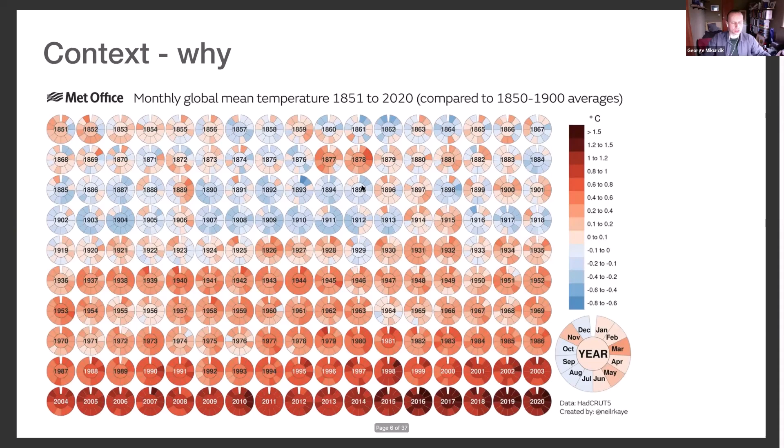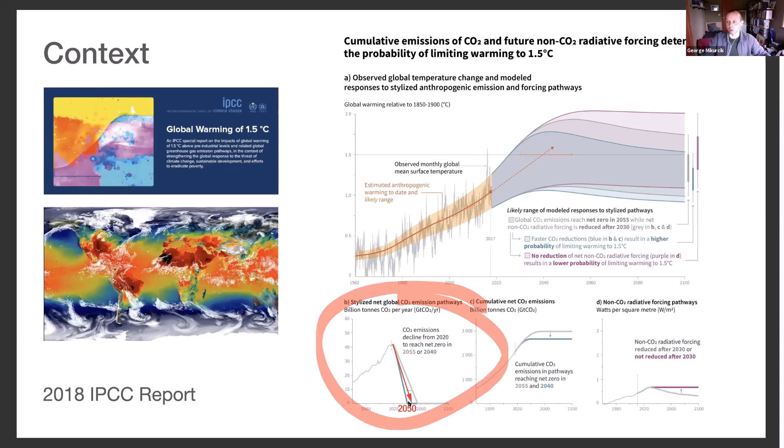In 2018, the IPCC, the Intergovernmental Panel on Climate Change, came up with a report that clearly outlined the pathways to stay within warming of 1.5 degrees from pre-industrial times. Where we are now is on top of this peak right in the middle of the screen, and where we need to be by 2050 is down at the bottom here. So it's a big, big challenge and really focuses our minds.

What it means for designing buildings is really we need to stop burning fossil fuels. That's the clear message. We need to say goodbye to gas boilers, oil boilers, and embrace renewable technology such as heat pumps, and we need to do it from now.

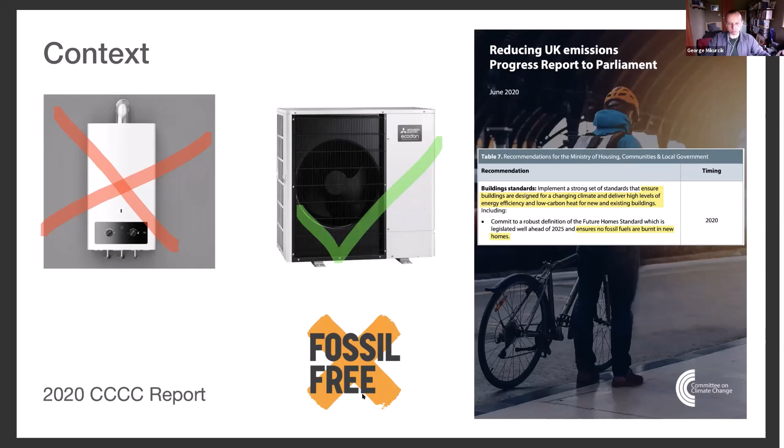So how do we get there? We could either do business as usual and wait for the grid to decarbonize. We know the grid is getting cleaner all the time, with more proportion of wind, solar, tidal, etc. So we could keep building inefficient buildings, but what that would mean is there will still be a huge demand on energy, and we would need to offset that energy by a huge amount of renewables.

Or we could do something a little bit more sensible, like radically reduce the demand in the first place, so have a small proportion of that demand, save a lot of energy, and generate only what is needed. So we obviously think the second option is the more sensible one.

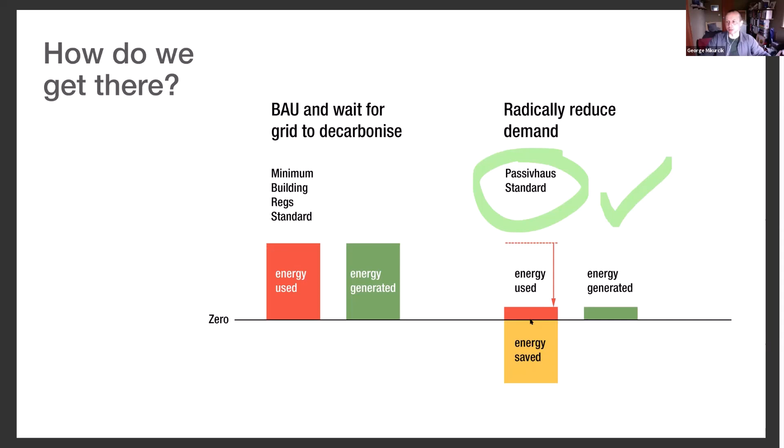So I mentioned Passivhaus in the previous slide. Most of you have probably heard of Passivhaus. It's a standard that guarantees quality of design and construction, provides comfort, focused on reducing the risk of overheating, drafts, mold, and poor air quality, and delivers huge savings on energy.

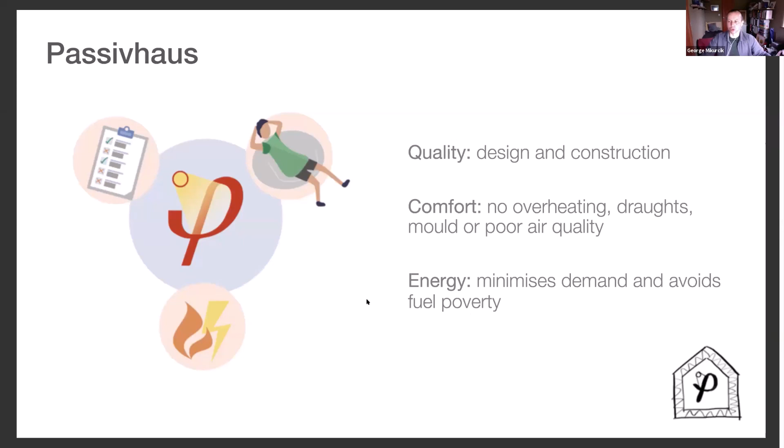And how it's doing that: it's doing it by efficient form, good orientation, using continuous insulation, having a draft-free construction, very efficient services including mechanical ventilation and heat recovery, and optional on-site renewables.

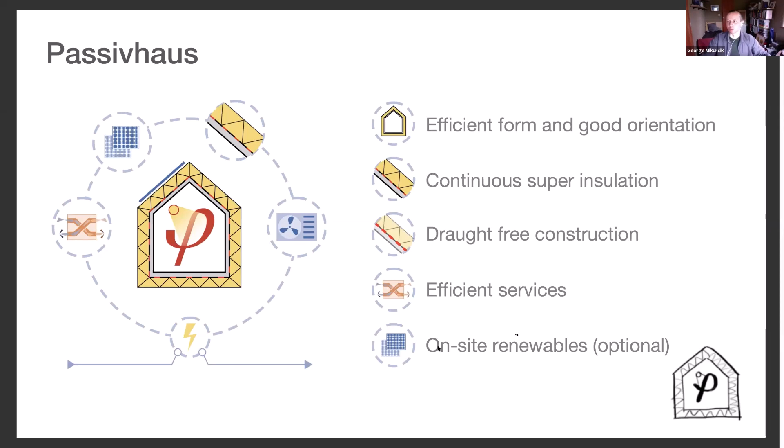The potential for renewables varies from project to project. For instance, individual houses have more scope to put PVs on the roof, whereas a block of flats in an urban area will have a lot more limited scope. So there are limits to renewables on site.

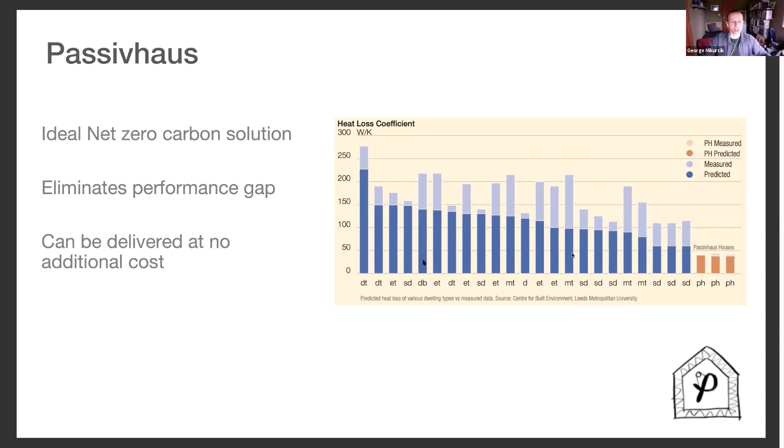This graph demonstrates the performance gap that exists in normal, non-Passivhaus buildings. There's a big gap between designed and in-use performance, whereas for Passivhaus, shown in the three bars on the right, the difference between designed and in use is very small. We know Passivhaus can be delivered at no extra cost if it's designed in right from the start.

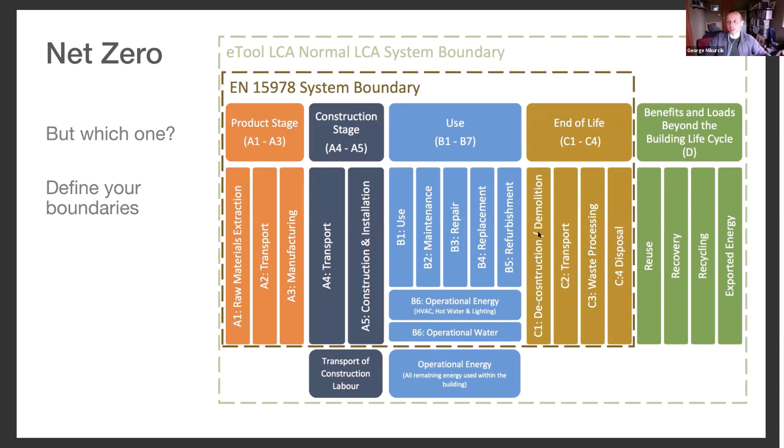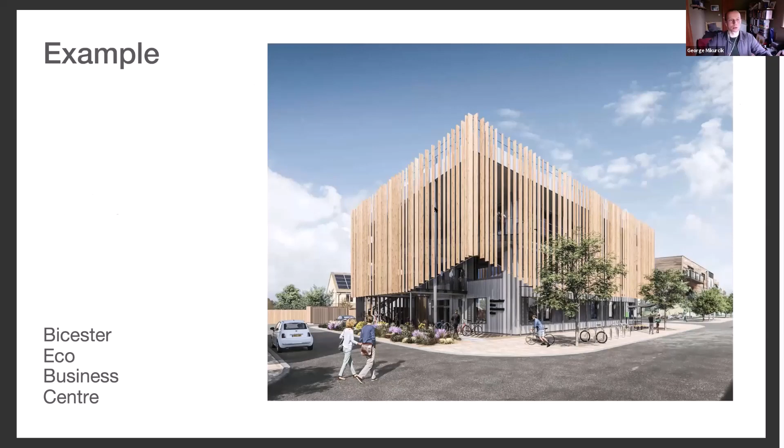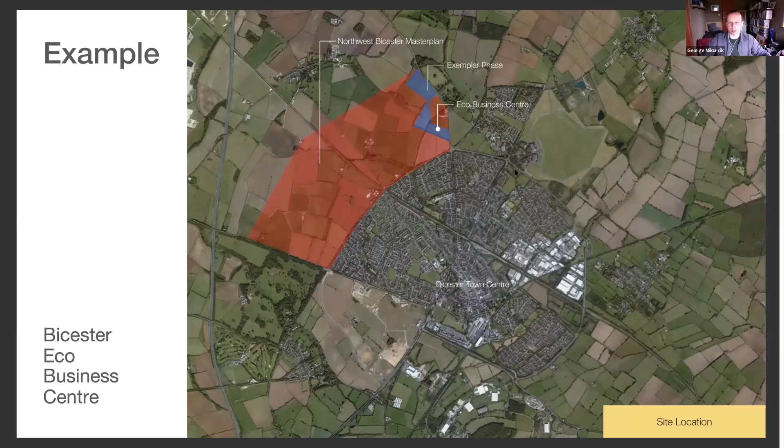As an example, I'll briefly talk about one of our projects that was net zero energy - an eco-business centre in Bicester that we completed a couple of years ago. It's a new development, a new business centre as part of a new master plan in the northwest part of Bicester town centre, which is mainly residential but also included a new primary school.

The brief was to deliver a flagship project which would be zero carbon in use, achieve BREEAM Outstanding, use as many natural materials as possible, and provide a business incubator for about 125 people. The brief didn't mention Passivhaus, but it all alluded to being Passivhaus Plus, effectively.

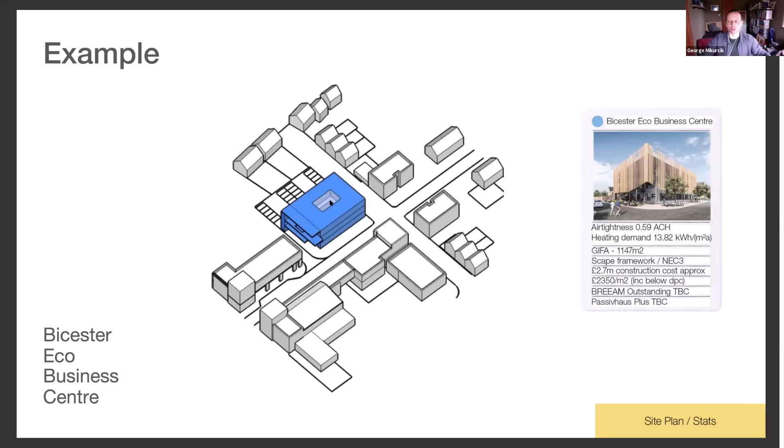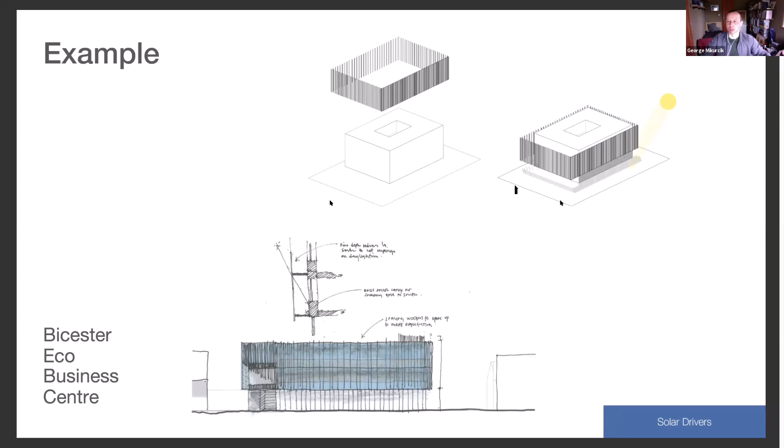In terms of form, it's a very compact, rectangular shape building with a central atrium, all within the thermal envelope. The facades face all four sides, so we had to really think about how to limit unwanted solar gains.

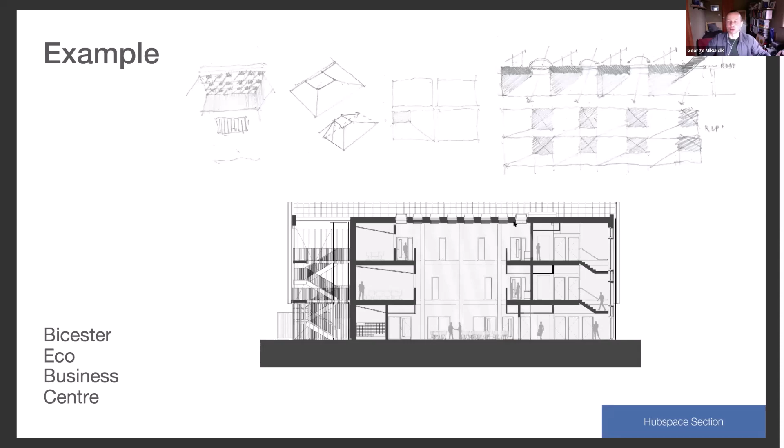This slide shows the section through the building, showing the central triple-height hub space with plenty of daylight coming from the roof lights, and admin spaces along the edges. A typical floor plan again shows the central hub space going all the way up, with flexible spaces along north and south.

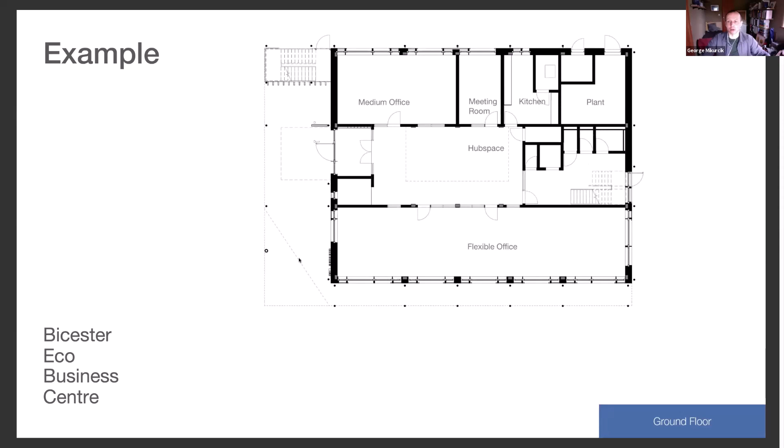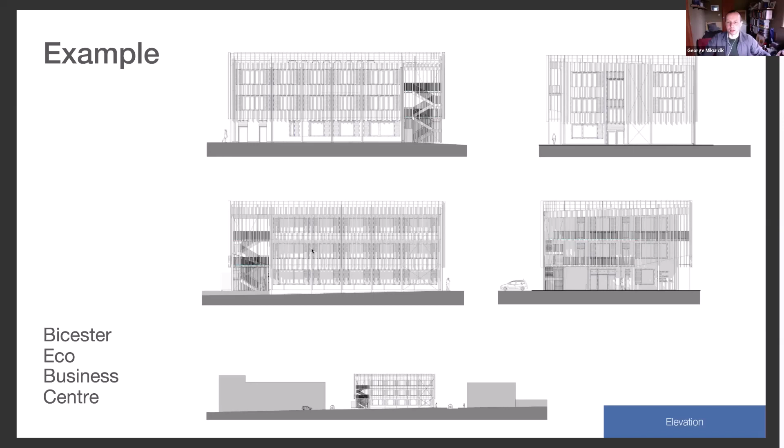The typical elevations show a series of external shading devices, timber fins, which provide valuable solar shading on all four sides.

In terms of construction, it was a hybrid - the contractor used a combination of concrete frame and timber infill panels, all super insulated on the outside to avoid any thermal bridging.

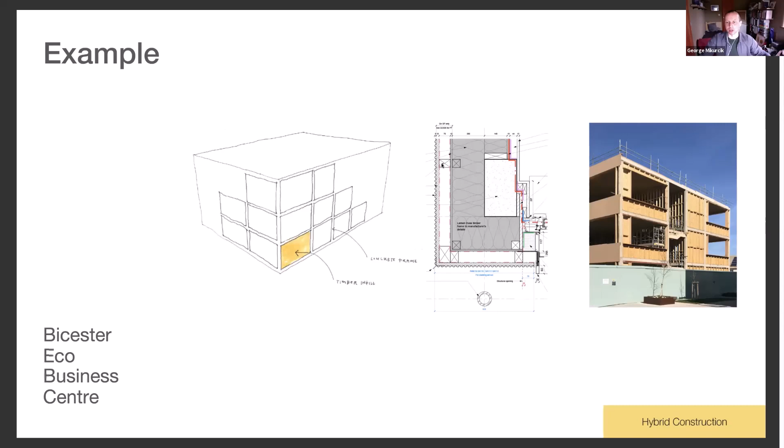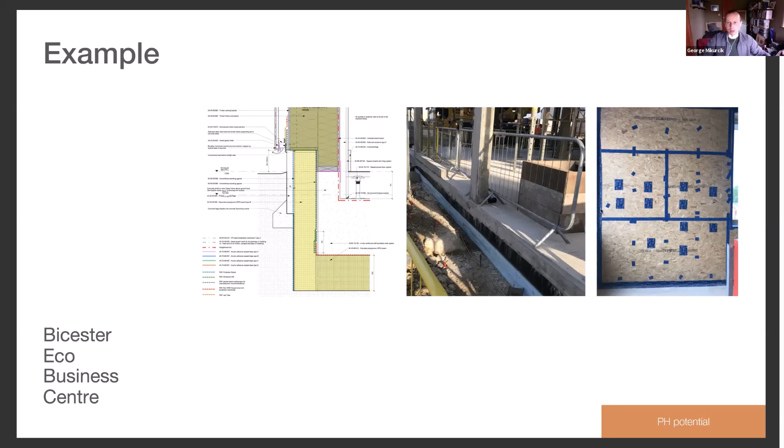As this project was net zero energy, we had to provide the renewables on site, and pretty much the whole roof was covered in PVs. This did present a problem - the local energy network wasn't strong enough to take the exported electricity, so they had to upgrade the network, which is quite interesting. So there are challenges with these new approaches.

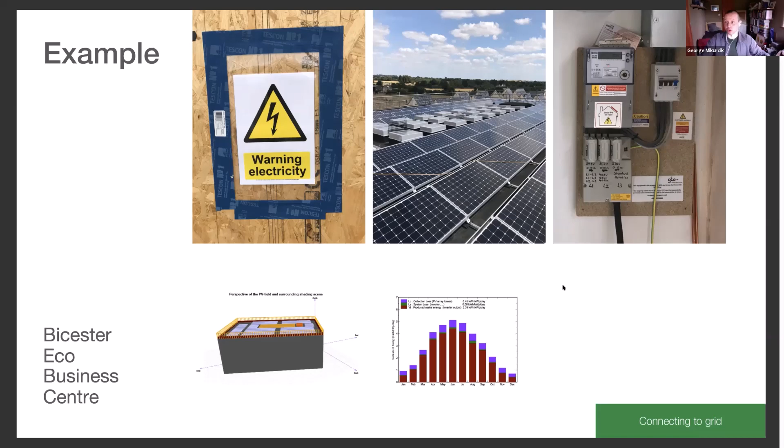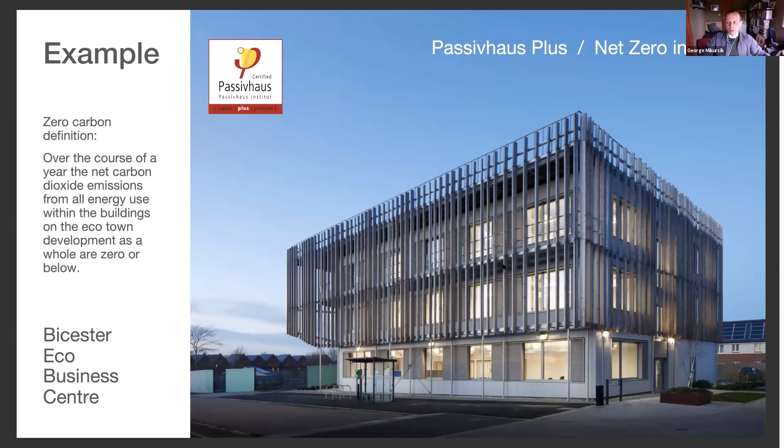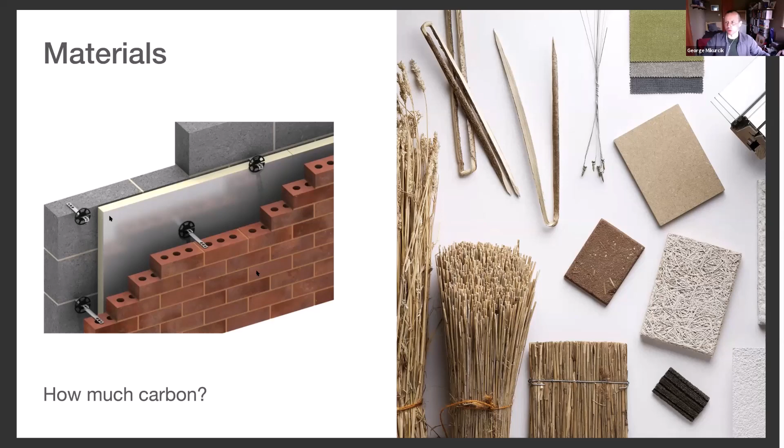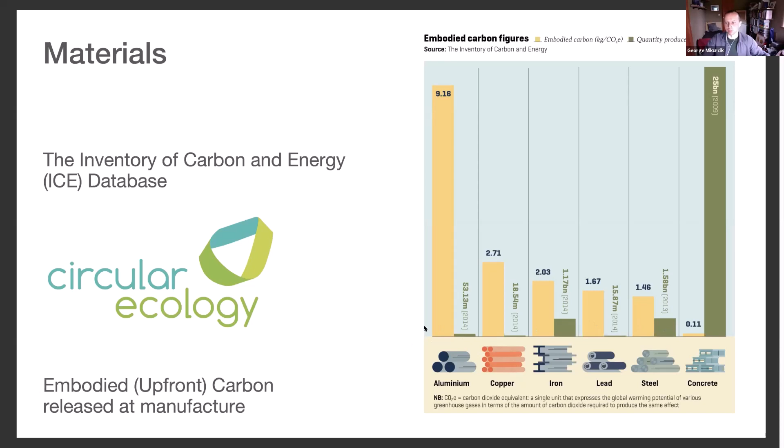As you can see, aluminium is one of the worst offenders on the left-hand side. But what's also worth pointing out is the overall quantity that's usually used on projects. Although aluminium is the highest per kilogram, in overall terms it's used quite sparingly. It's the green bar that gives us an indication of how much of that material is actually used on a project on average, so it all needs to be taken into account.

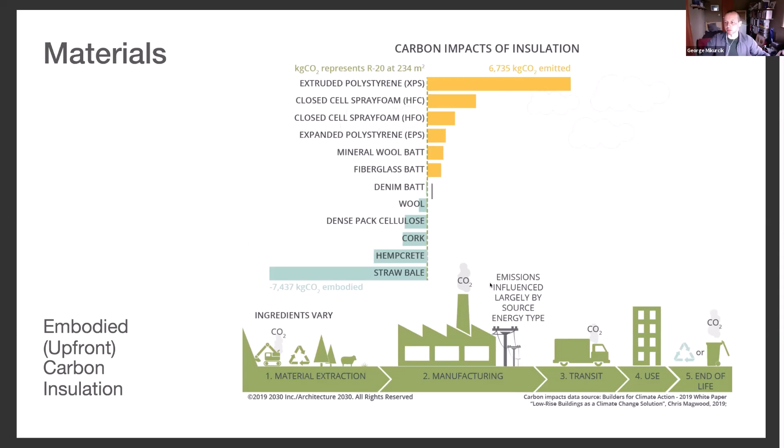I'm just going to show a couple of slides of systems which embody low carbon and material sufficiency. When we talk about timber framing, there are various options, including standard timber framing, CLT as a kind of mass timber, or something like Ecococon, which is a twin stud timber frame system, pre-insulated with straw. It is actually the system that we used on our house here.

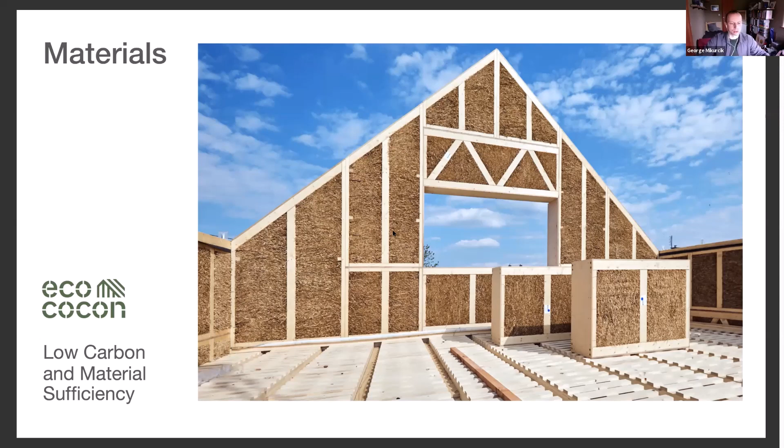A very highly efficient product that uses natural materials, is fully recyclable at the end of life. There are no chemicals involved, and it has a cradle-to-cradle certification as well, so it is fully recyclable at the end of life.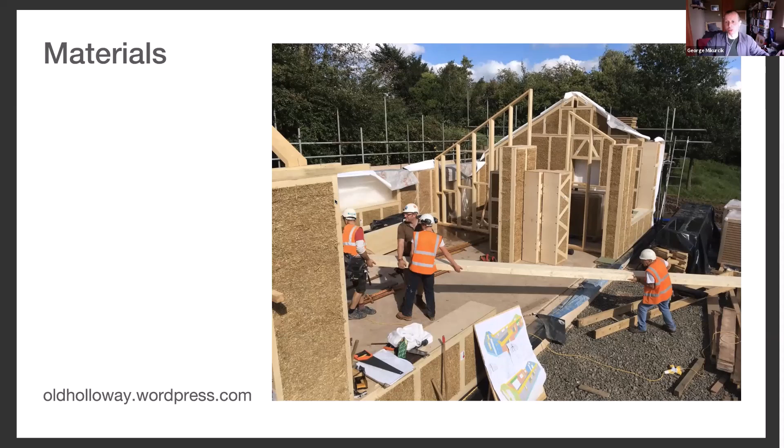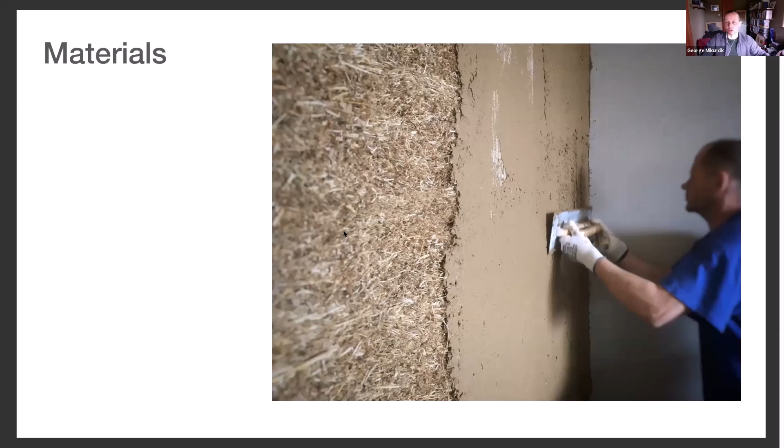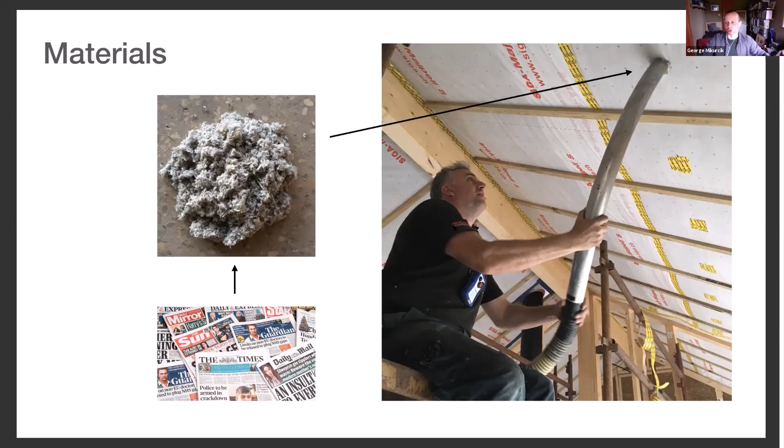We also used clay plasters - again, a very natural material with low embodied carbon that at the end of life can simply be reused or buried in the garden, because that is what it is. Again, an example of an insulation that takes papers, recycles the cellulose, and it can be blown into construction as the final product.

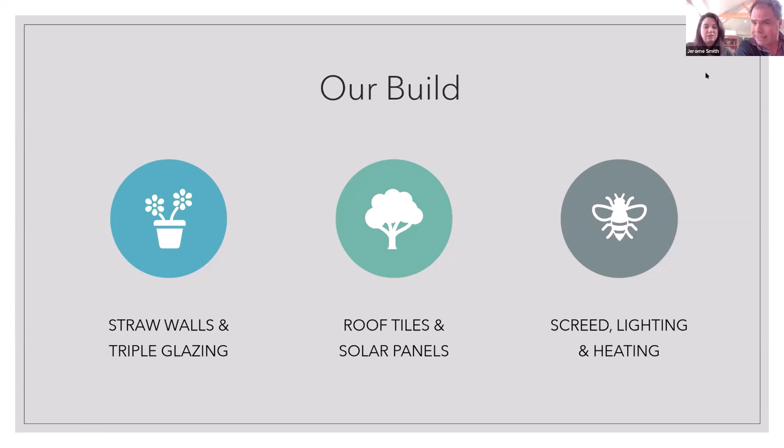The solar panels - the closer you can produce your own power is a massive gain on so many different levels. Internally, things to do with what screed we used - so you can use a concrete screed, or you can use something other than concrete, which we ended up using, which we'll talk about a little bit later on. And obviously the lighting and heating is massively important, so how much energy you're using throughout the year.

So there's just a few slides showing again what George was talking about, the actual frames. So effectively it's a glulam frame, excuse me, with straw compacted into it, and it's a modular system.

The walls are constructed off-site and then delivered on a lorry. It took about a day and a half to go from a slab to walls and trusses, then for the next four days everything was tied in, and the next stage went on to the builders, who started doing the membrane on the roof and getting that prepared for the solar panels.

As I said earlier, the really important thing for us with the building is that it could not have fluctuation in temperature. It's got to stick at around 18 to 20 degrees throughout the year, otherwise making chocolate does not work.

For us, the best way that we could find to build the walls was through straw, for sustainability.

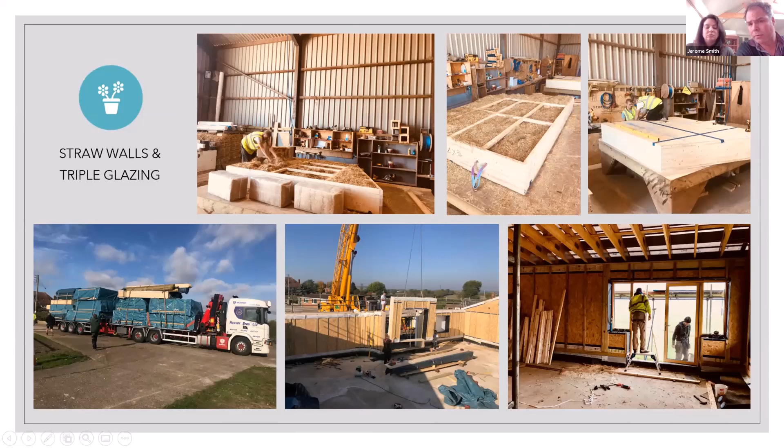On our roof, we managed to incorporate as many solar panels as we could. So we effectively have a tile edge around the building, and the inside of the roof are panels, so there's no tiles underneath the panels. They're effectively recessed into the roof.

I'm trying to think—I can't remember why we couldn't go edge to edge with panels. No, I can't remember why, but there was a reason why we couldn't, so we had to incorporate some tiles as well.

So the tiles are reconstituted tile, which effectively gets smashed up and then has a resin in it—it's Welsh slate. So it's a Welsh slate roof tile, which we're really happy with the look of.

In reality, they were pretty difficult to do, but it's important to know what you actually built out of. Yes, it's waste materials from Welsh slate that's then been reconstituted with resin into a tile.

But we also had real big problems because our roof is really shallow, so we struggled trying to find a tile able to withstand such a shallow roof. That in turn created more problems for us, to do with having to incorporate solar panels with some tiles, and nobody wanted to stand by any warranty whatsoever with the roof.

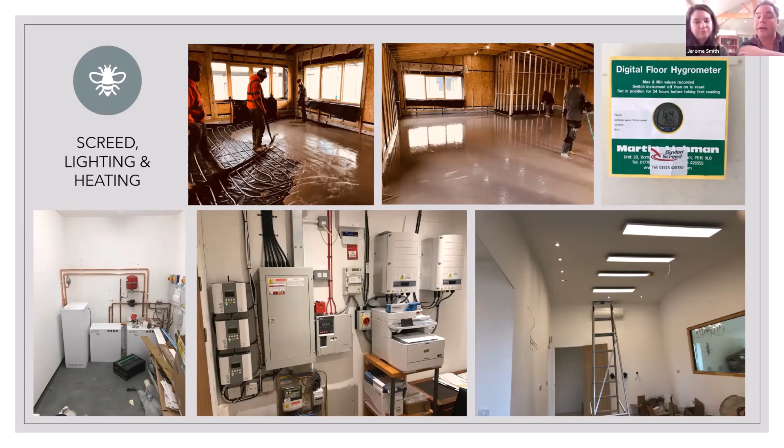That's an ongoing small problem that we have at the moment, but I do think we are getting there with the help from SunAmp.

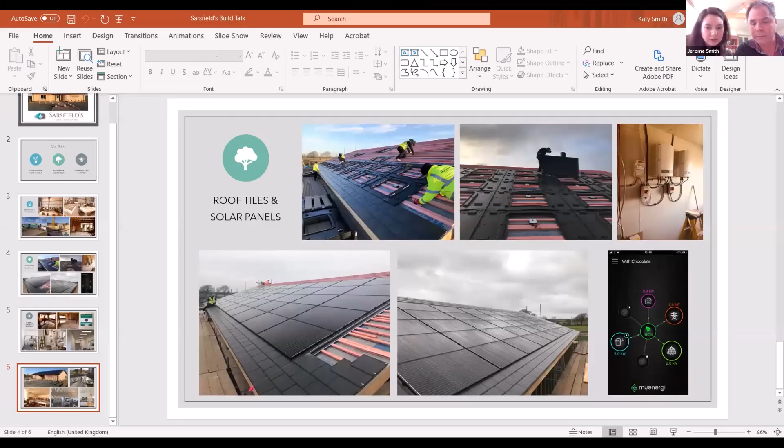Internally again, lighting-wise, everything's got to be dimmable, everything's LEDs. So we're again just trying to cut down on the amount of power consumption we're using, which happily seems to work.

Our general consensus, we're really super happy with what we've managed to do, and the amazement that people give us from knowledge of either the roof or what the floor is, or the fact that we've used straw to construct this.

I wasn't convinced initially because it was such hard work. It makes everything harder because you're going down a non-conventional route, or as people see it, a non-conventional route. So it just makes it a harder process.

But Jerome had the vision and wanted to do it. I think I would have probably given in, but I'm glad that we didn't, because we can be so proud of what we've done now, and the customers, when we talk to them, it's super nice.

The more buildings are built like this, especially businesses, it becomes progressively easier and easier for the next person, the next companies. It becomes easier, and then hopefully we'll stop building places in the way that seems to be the general consensus.

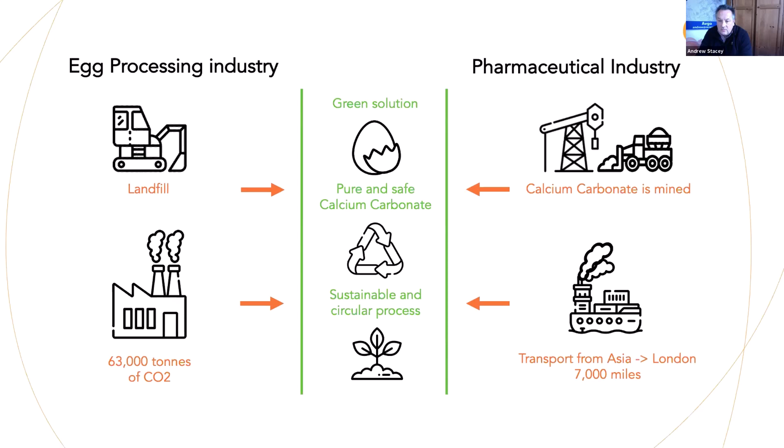That sounds pretty good, doesn't it? So this is a quick overview of what we do. We take eggs, we put them into our plant—it might be called a biorefinery by some people—and we're producing material for you to ingest in your drugs. We're also producing waste material. So eggs have got membranes; we could use that in bone and joint treatments. It's something we haven't looked into, but we're thinking about it.

And the contribution of Mike, the engineer, was that he's taking all of our waste products and converting them to input chemicals. So that means that we're totally circular, and from a cost point of view, we've dramatically reduced our input costs, and also we're not moving large trucks of chemicals up and down the motorways and across the country. We're also producing this material locally in the UK for UK markets, so we're not having problems with carbon footprint of importing and moving things from abroad.

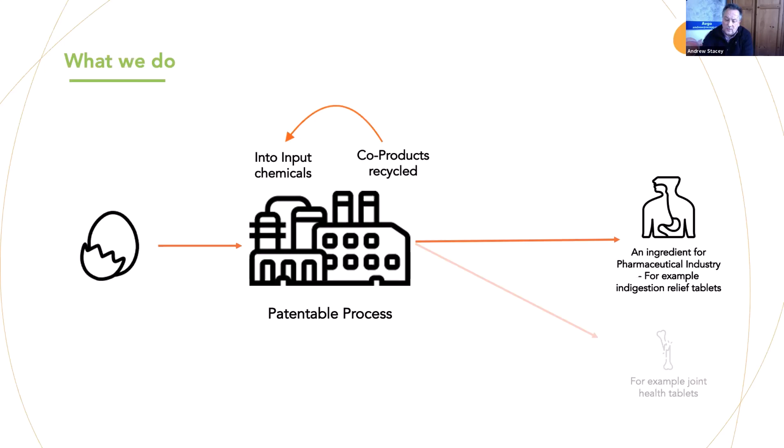So that's what we've done with the calcium carbonate, but we're also looking at other materials. The emphasis is that we can produce chemicals that we're buying from foreign parts just as well in the UK. We've actually had discussions with people who are suffering from both COVID and Brexit. There are difficulties getting chemicals out of Europe, difficulties selling chemicals into Europe. Why not produce them in the UK?

So a second project we're involved in is taking waste from mushroom plants, and we're doing exactly the same thing. We're going in, taking the mushrooms, treating them, getting out the useful resources that are in them, and making supplements and antimicrobial and anti-inflammatory products.

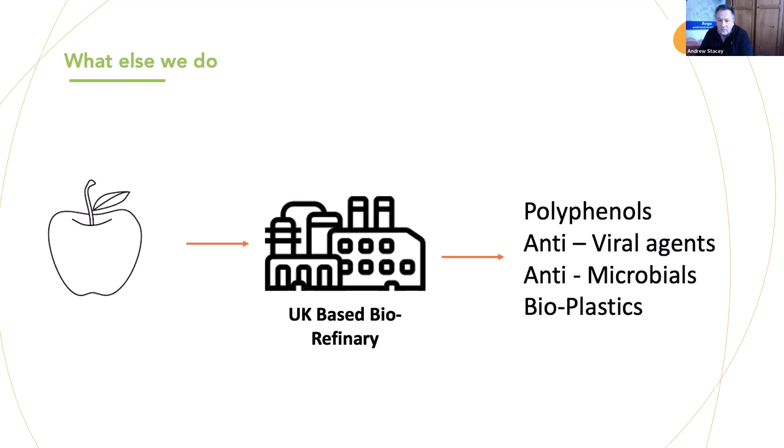And finally, we've got a project with apple waste, where we're doing the same. There's a lot of material in apple waste. Yes, you could feed it just to your pigs, but we can actually do a lot of things that will help people. We actually got on this project because of COVID. There's material called polyphenols, which has antimicrobial and antiviral activity. And the waste from the overall process makes bioplastics.

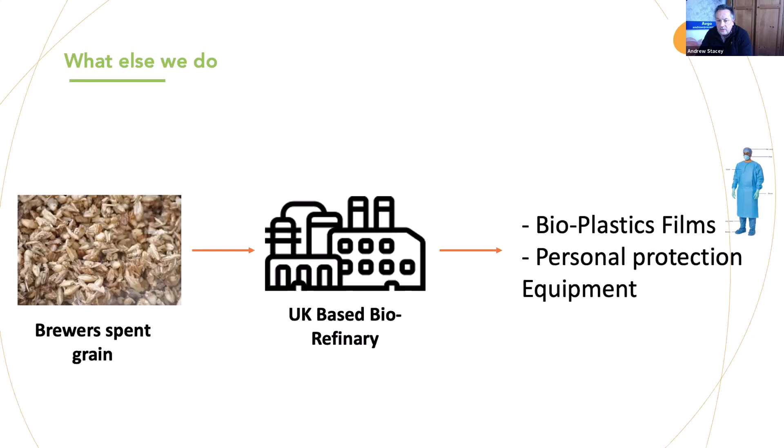And as an aside, we also were riding the COVID wave and found that brewers' waste could be turned into bioplastics. So we're looking at personal protection equipment for medical and other applications. The emphasis being here that we are working with a biorefinery, which ultimately takes a resource that is generally wasted and makes better use of it.

We're reducing the problems with landfill and cost, reducing carbon emissions, and generally we're helping the environment. Whereas on the other side, we're potentially improving the corporate social governance of our potential customers, increasing UK technology, and generally improving business in the UK.

Essentially, we're here to try and make a small contribution to make the world a better place for you, me, and our children. And that's the end for today. I'm open to questions.